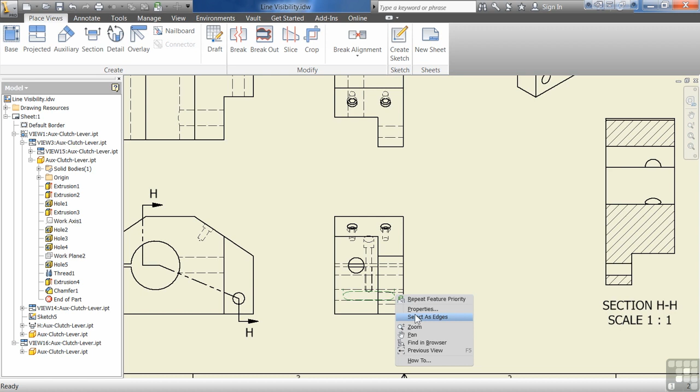I can do that one line at a time, or I can come up here to my selection filters, say Feature Priority, select the entire feature, right-click, say Select as Edges, right-click again, and turn off the visibility. Do that again, select as edges, turn off the visibility.

If I accidentally turn off something I need, I can select the view, right-click, say Show Hidden Edges, and say, okay, I didn't mean to turn off this one and this one, right-click and done. So those two will come back. I could select the entire thing and get everything if I want. It gives me the ability to turn these on and off.

I also have the ability to come over here in the browser and select objects, right-click on it, say Select as Edges, and turn off the visibility. So I don't even necessarily have to know where it is in the drawing. Right-click on it, Select as Edges, right-click, turn off the visibility.

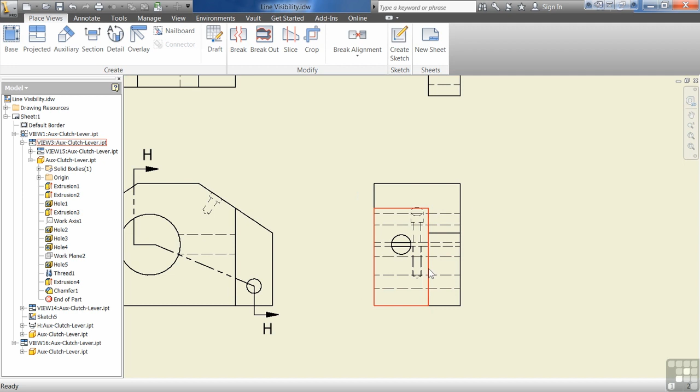So I can go through there and select each individual object and turn them on and off as needed. See there? You can turn off the entire thing by selecting as edges, visibility. So you can see you can get a really good, clean model based on what you want. The same goes for things such as hatches.

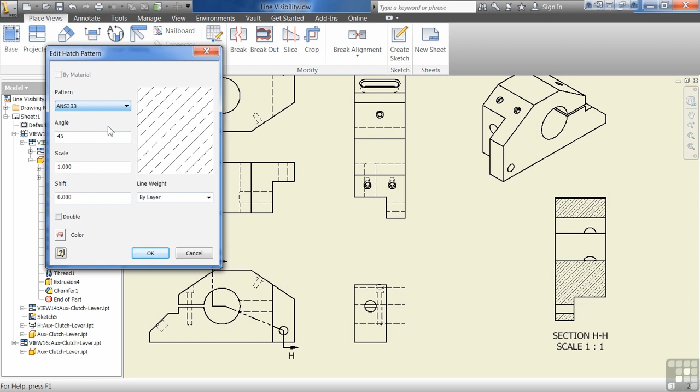We can right-click on a hatch and we can edit it. So we can actually change what a hatch looks like. We can change the color of it. We can also change the color of a line. You right-click on the line. You go to Properties. You can change it to a different color.

You can change it to a different line type. You can change the thickness. So this line can have a different look than the rest of the lines. Most of the time you're going to control that by styles, which we'll talk about later on.

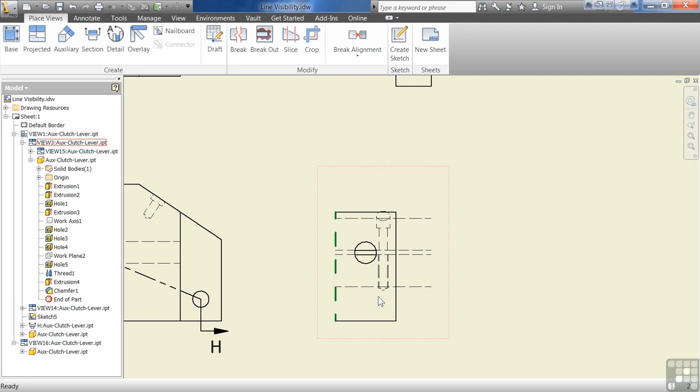But if you do have one line you need to override, you can come in here and look at the properties of just that one line and override just that one line if you want and do whatever you want with it. It'll understand that you want to edit just that one line. And you will notice that whenever we click on these, it doesn't affect the other views. This is only going to affect this one view.

So if I come in here to the browser and select something, it's only going to select something for that view. If I go into the child, I can do the same thing for the child as far as selecting lines as objects. Right-click on it, say Select as Edges. Right-click, turn off the visibility. But it's only going to be for that one child.

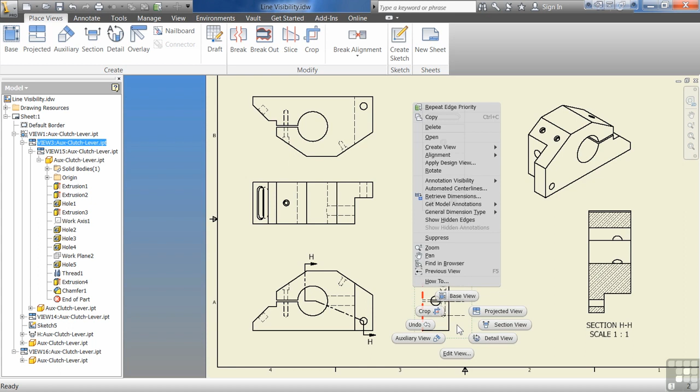Be careful with this. Don't go overboard. Because if you do select these and you remove them, you have to remember that that's not really proper drafting technique to remove all these hidden lines. Either show them or you don't.

Not saying that you can't just show the holes or something like that, but there's a reason Inventor does it like this. But if you do have the situation where you need to come in here and override just this one, it's an easy way to do it. Just select it, right-click, and hit the visibility to turn it off.

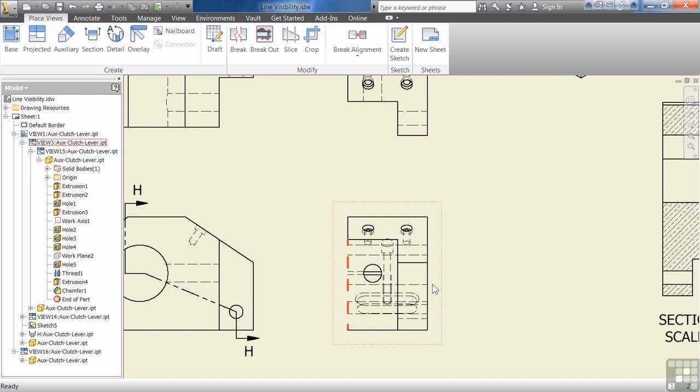If you want to undo something such as this line here, hit Properties. I can change it back to by layer, just like AutoCAD. Same with the color. So now it goes back to looking like all the other lines. So it's really easy to mess with the line type visibility or the line visibility.

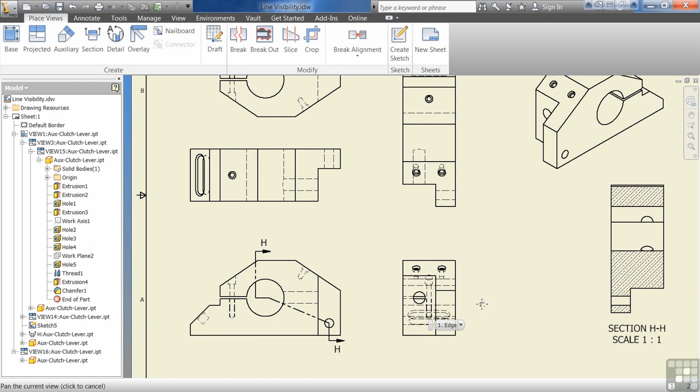You can also change the lines to different line types for the hidden lines and play with this a little bit, see what you can turn on and off. I'm going to leave a drawing called linevisibility.idw for you to play with turning lines on and off. See what you can turn off and see what you can turn back on.

Don't forget, if you need to turn it back on, you right-click, Show Hidden Edges, and select everything you want to turn back on, hit Done. It's really easy to do, and see how much fun you can have with this.